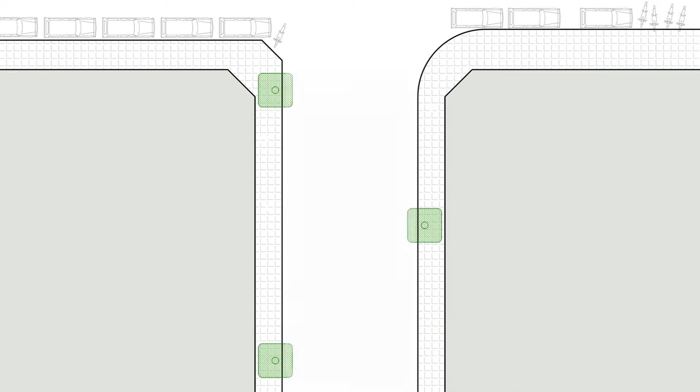In the current situation, the average width of Basta Street can accommodate 4 vehicles. However, there are up to 3 cars parked on the 2 sides of the street, which leaves room for barely 1 vehicle to pass. The intersection is most of the times packed and blocked, which makes visibility impossible for drivers and leaves no proper accessibility to pedestrians.

We propose to reduce the width of the road while widening the sidewalks so as to accommodate 2 lanes for passing cars: 1 lane dedicated for regular vehicles, and another lane for public transportation and/or emergency vehicles.

As for the parking situation, there will be reserved parking spots for the service of shops whose business type urges instant shopping. Conversely, the area acquired by the expansion of the sidewalk is for the advantage of public space.

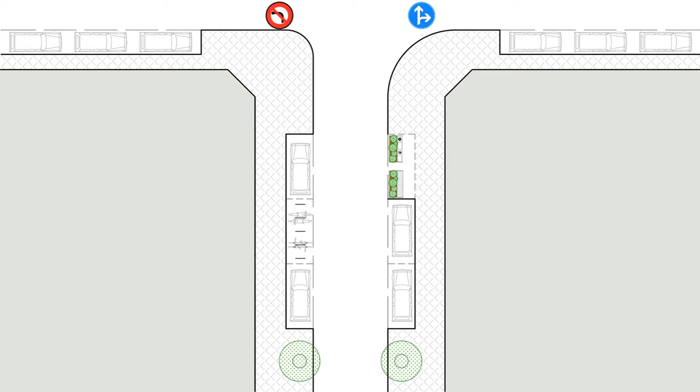We propose to clear the intersections by adding plants of a suitable height. The pedestrian tracks will be outlined and clearly secured.

Since the whole city is in desperate need for environmental regulations, it is essential to accommodate soft mobility trails and to reduce parking spots by increasing vegetation as much as possible.

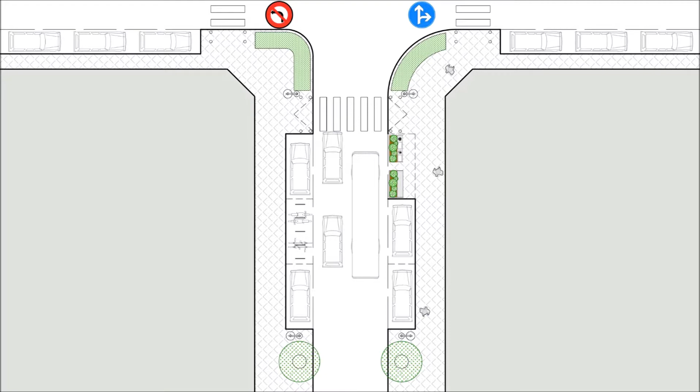We aim to preserve the visual order through setting regulations for shop signs, in a way to control the visual alignment and coherence. We intend to provide more space for public daily life by imposing rules that ensure decreasing the number of parked cars.

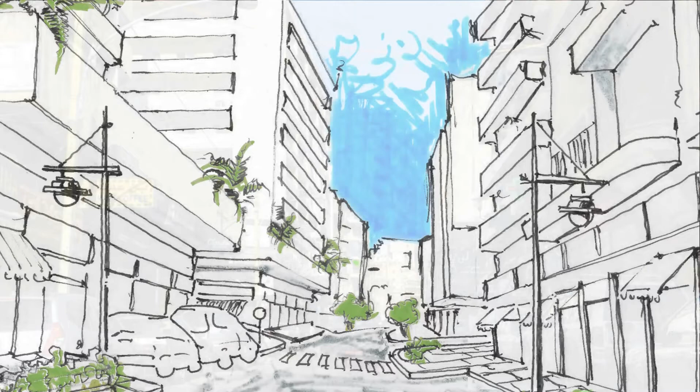Following Kevin Lynch's structured arrangements, we try to assemble urban landscape components into a logical and systematic setup. By setting a proper aligned arrangement of trees, regularly trimmed, we improve the urban structure and maintain legibility.

We envisage to restore the facades of the classified heritage buildings to better reflect their value in the public space, and to preserve the landmarks by reinforcing their spatial presence, always for the welfare of social practices.

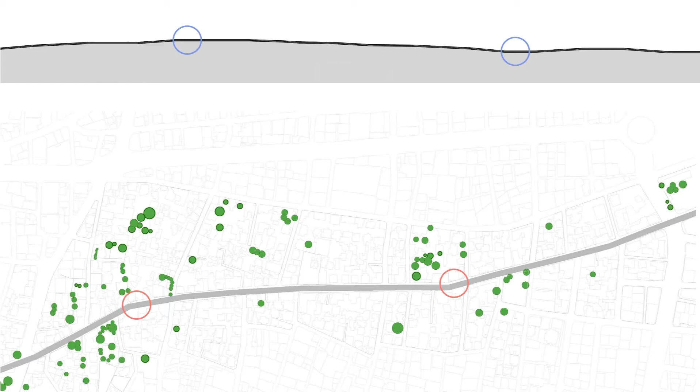Based on the topography, we mark the major curves of the street and the extreme altitudes of the ground, which exhibit the street into 3 sequences. Henceforth, the study continues accordingly. Mapping ages of buildings enriches the findings of the landscape situation.

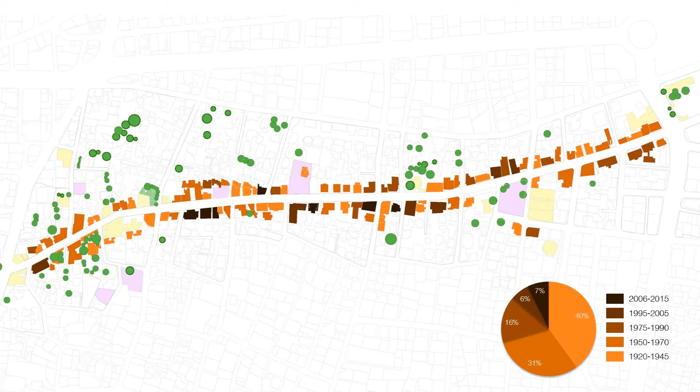The dominating era of construction brings a different feature to each sequence.

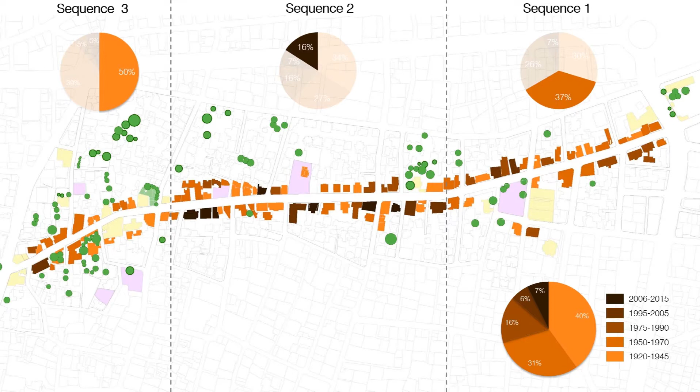The mental map can be defined as the organized representation that an individual makes of a part of his spatial environment. According to Professors Merlin and Choay, the mental map is a subjective representation of the urban space by an inhabitant from the places he is accustomed to frequenting.

Memory plays an important role in the perceptual process. One remembers bold elements that he could recall from a place or from a trip.

Thus, a specialist can propose to a user to retranscribe on a map the places he frequents and of which he keeps a trace in memory. The mental map is a tool that allows the meeting between the mental, cognitive, and the material dimension of representations.

As a method of analysis of the collected mental maps, we mark the elements stated the most in order to spot the areas of social value and the ones that lack landmark and legibility, based on passersby's and users' experience.

As previously mentioned, the need for parking lots is correlated to the shop's business type. By analyzing the survey, we find that each sequence has a dominating type: gold market in the first, clothing and food in the second, crafts in the third.

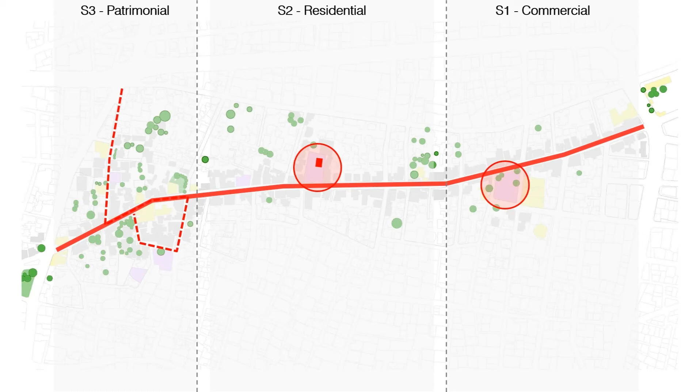The Monument Square represents an extension to the Main Street's public space. With the statue of a popular national character in the center, it constitutes a point of reference for passersby.

Along with the three underground parking levels, the square's openness and welcoming outlook support the commercial trait of the first sequence.

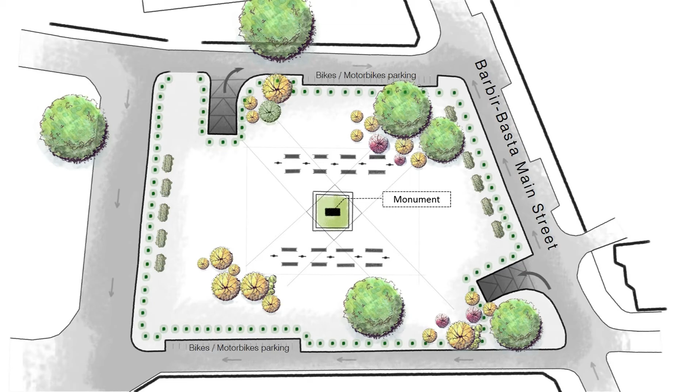The public garden, on a lot surrounded by the back elevations of residential buildings, is formed with three underground parking levels underneath.

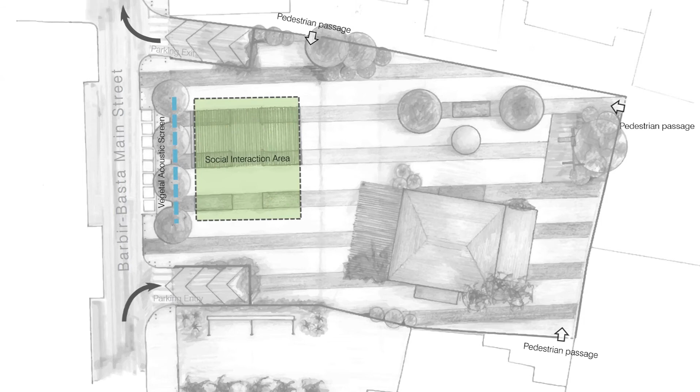The tiny old house is renovated and will be hosting educational activities for youth.

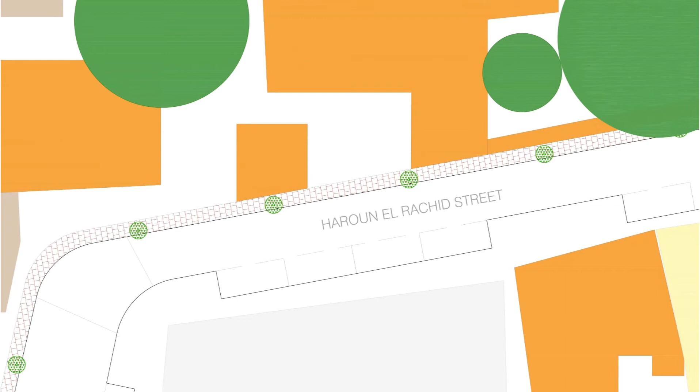The pedestrian circuit is created across what remained of the early 20th century's urban fabric. The design consists of one regular sidewalk marked by orange trees, while the other sidewalk is intentionally made narrower to allow parking spots, in addition to lighting that emphasizes the restored heritage facades.

The intervention on the patrimonial level has an impact on the sense of belonging of the residents, where the feeling of abandonment towards the neglected, wasted space turns into feelings of pride.

The Urban Landscape Project proposes planning for legibility and the improvement of the public space. Moreover, social rehabilitation would occur as a collateral benefit from this proposal, such as more space for social practices on the main street, in the public square, in the public garden, and through the pedestrian circuit.

Returning to the methodology, we recall that the comprehensive study examined several elements ranging from the socio-economic and environmental aspects to the landscape and heritage, always with the aim to produce an evidence-based planning that secures balance and sustainability.

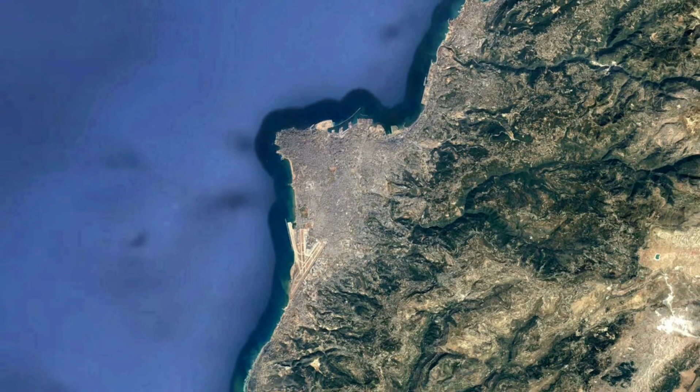It's a method with customized tools according to the case study or location, whether it was a neighborhood, a waterfront, a village, a valley, or any territory inhabited by residents.